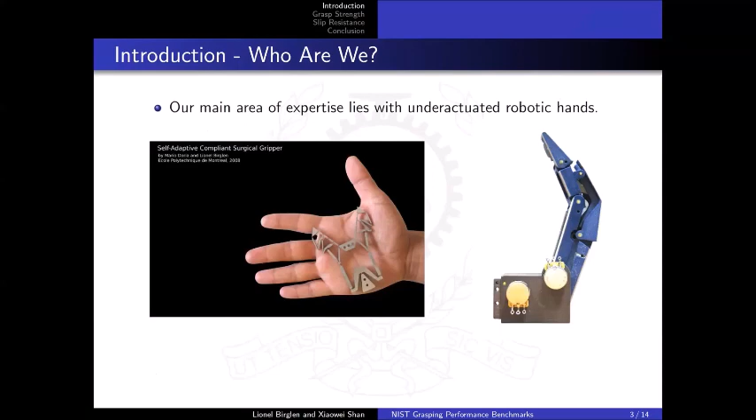One word of warning, maybe. We are robotic hand designers, and we are mainly focusing on grasping. We do very little manipulation. We have dabbled a little bit with manipulation in the past, but that's not our forte. And we don't do so much grasp planning. So this presentation has to be understood as coming from people who design hands for grasping. So this has a strong influence on what we have been doing and how we see the NIST test bench.

Basically, to make a long story short, in 2016, we received a grant from the federal government in Canada to prepare for the commercialization of our adaptive finger design, which is illustrated here on the left. And at that time, we thought it would be a good opportunity to replicate the NIST test bench and to use that to characterize our fingers. So this is the backstory of our replication of the protocols provided by NIST. And with that, I'll leave the virtual floor to Xiaowei to present the technical aspects.

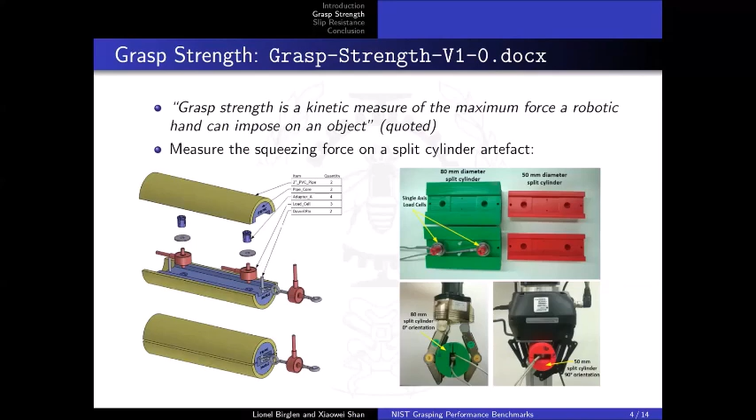Multiple cylinder diameters should be used for the preload capabilities of a particular hand for various object sizes, as can be seen from the right-hand figures. Next. Here is a data plot example in the benchmark of the total grasp force, namely two load cells, through which the mean grasp force was extracted for each data set. Next.

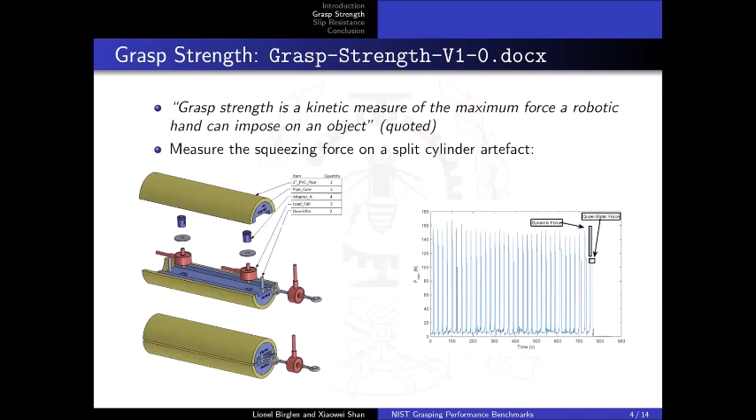In analogy, our tests utilize two artifacts, 2 and 3 inches, designed and built with multiple uniaxial load cells, as can be seen from the figure on the left. 3 load cells and the steel plate were mounted on the upper and lower cores, respectively. Actually, we redesigned the split artifact a little bit because fewer load cells may lead to imbalance, while more load cells may not be able to touch the steel plate simultaneously, probably due to fabrication errors. The 3 load cell configuration avoids the problem, since 3 sensor tips define a plane that can always be adapted to by the steel plate.

The reason we use steel plate is to avoid the shear force exerted from the fingers, because shear motion cannot be constrained by the steel plate, but it does not affect the transmission of the normal force along the sensitive direction of the load cells. Finally, rubber bands were utilized to bond the 2 cores. The preload of the rubber bands can also be zeroed in advance.

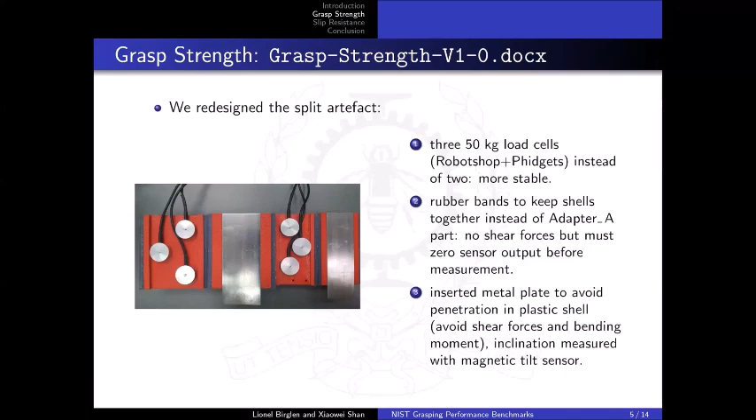Next. The artifact using 3 load cells was calibrated with known weights. The upper core facing downward is screwed with the load cells. The sensing tips directly touch the steel plate, which is clamped on the table with an underlying wood board. The weights were measured with a precision scale and then added in a bag hanging onto the artifact. Next.

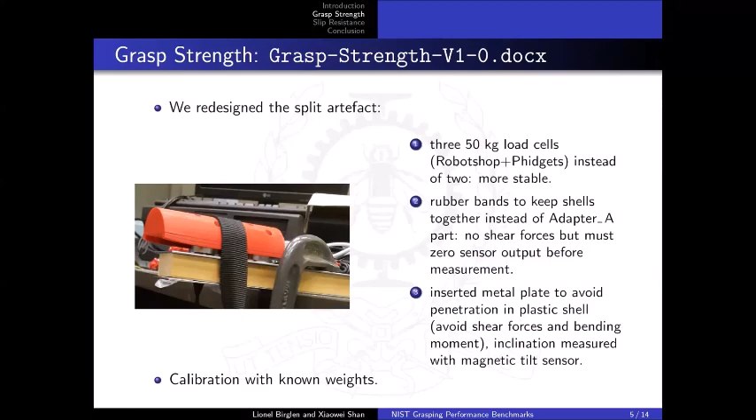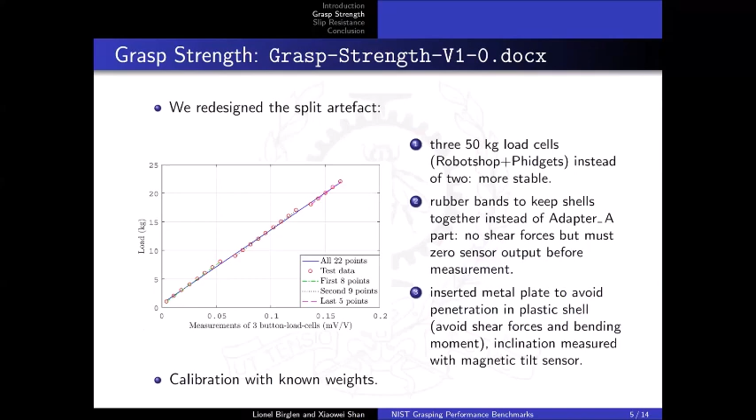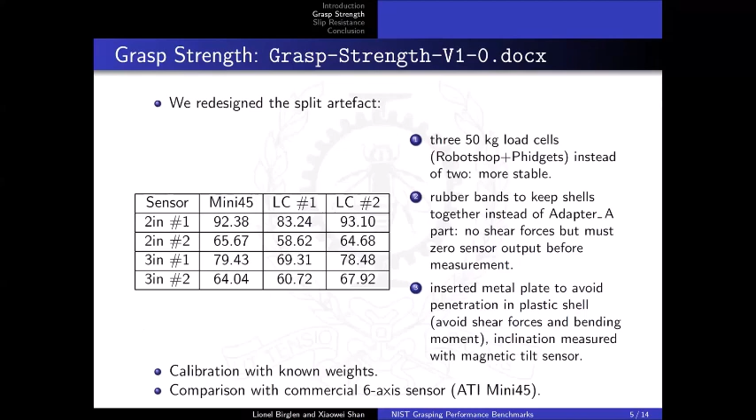Actually, we ended up usually relying on the version with the ATI sensor, but as long as the calibration of the load cells is verified, it is an accurate replacement to build an artifact with relatively cheap load cells. We can see the comparison of the cost. There still remain some issues. First, calibration is important, as can be seen from the comparison table previously.

Second, the half shells sometimes separate because of the bending moments from the fingers, and also because the fabrication is not perfect. The two fingers are not exactly symmetric, so there are also shear forces applied onto the artifact that sometimes shear the two cores apart.

Moreover, sensitivity to the tilt angle is worrisome. For example, how to hold the artifact in the air before the finger grasp is a concern. Many manual holds cannot ensure the orientation and contact height, although we have the tilt sensor. It was found that orienting the hand horizontally instead of vertically in the benchmark and placing the artifact on the breadboard with a sponge below could generate much less fluctuating grasp forces. It is an interesting finding in our test.

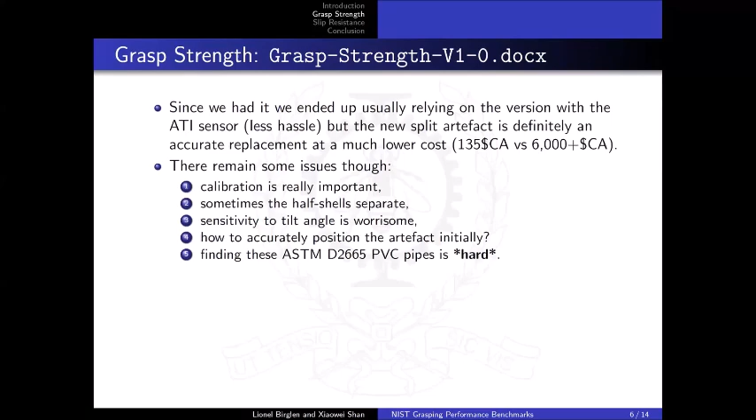Okay, the next test benchmark we have tried is for the slip resistance. It is defined as a kinetic measure of a robotic hand's ability to resist a slip. The focus of this metric is to investigate the inherent surface friction properties of the hand. There are three steps based on the figures. First, place a cylindrical artifact in the robotic hand using a wrap grasp at maximum power.

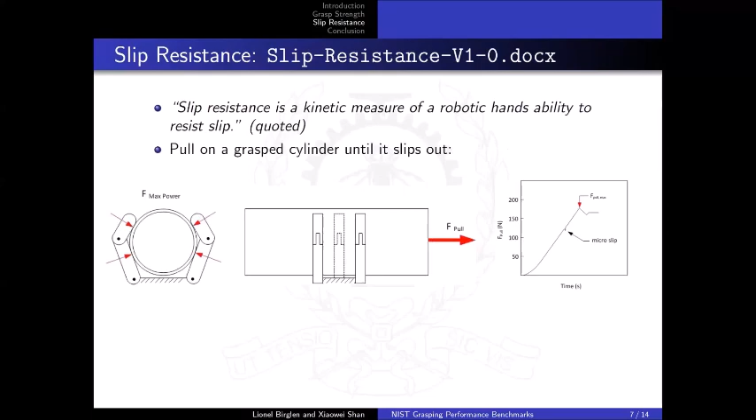Second, pull on the pipe at a controlled rate of increasing force, recording force until gross slipping is visually confirmed between the hand and the PVC pipe. Third, repeat this process over a range of standard PVC diameters that the robotic hand is capable of grasping. Next.

This figure shows an example test in the benchmark. It was conducted by commanding a fixed robotic hand to wrap around the standard PVC waste pipe. The common trend in the test was that the pull force increased almost linearly before reaching a peak force, and then yielded a sudden drop in the pull force. The selection of spring, I think it's next page. Yes, the selection of the spring and linear actuator is very important for the control of the load rate. Next.

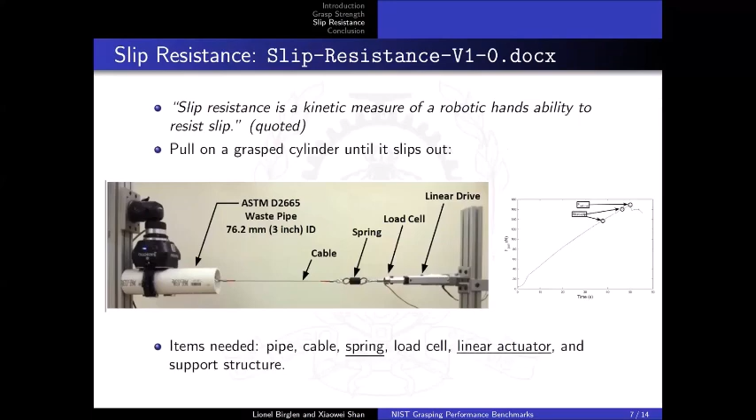In our replica, a linear stage provides incremental loading on the pipe through the fishing lines. The fishing lines are attached to an S load cell and the L bracket, as can be seen from the left figure. The load rate is decreased using an inline spring. The measure of interest in this test is the maximum obtainable pull force under grasp. The test was conducted under a nominal 6-bar pressure by the pneumatic actuation.

On the right side, we can see the corresponding test results of some different configurations. It is not exactly like in the benchmark described that there's a sudden drop. Sometimes there's just a gradual change after the pull force reached its maximum. So it's another interesting finding.

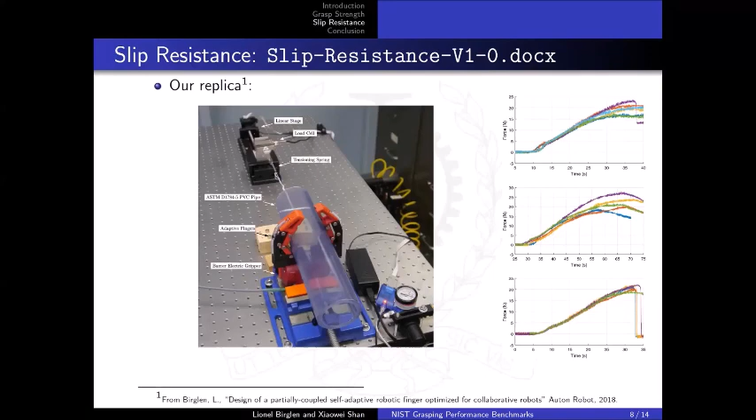Next. This figure on the left side, we used this setup also to measure the pullout resistance of various configurations, in addition to wrap and pinch grasping. Especially, you can see from the lower left side, the pull-out configuration of a robotic hand was illustrated. The corresponding test results are also shown in the right-hand figures.

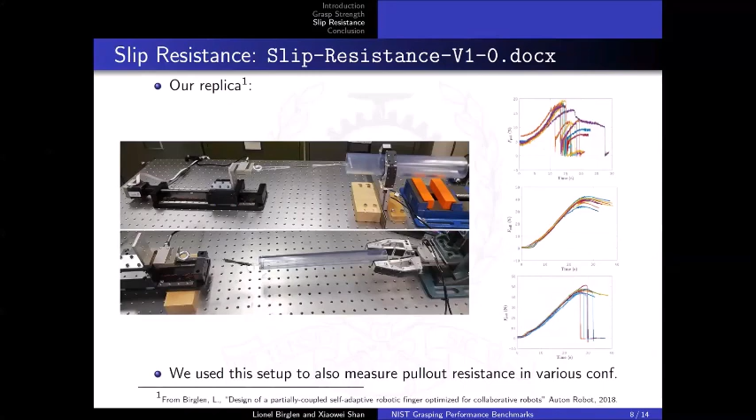Because for the pull-out test, the artifact dropped out of the hand, there are some very sudden drops in the force in the test results. Next. These are the components we used for the test setup. Still, a few minor issues remain for further consideration.

First, the test results can be quite variable for power grasps. We suspect how the object is placed in the hand is one of the culprits, because sometimes, if we put the artifact directly onto the hand, after grasping, the initial impact may lead the artifact into another orientation. And if we manually hold the artifact, the height and orientation can also be tricky. So there comes the variety of the power grasps in the test results.

Besides, the spring stiffness and load rate must be selected in accordance with each other for repeatable results. This is also after trial and error, we found that the load rate needs to be very well considered, combined with the purchase of different springs and the stroke range of the linear actuator we purchased.

In addition, the travel range of the linear actuator is related to the expected pull-out force and spring rate, as explained just now. Finally, we had alignment trouble sometimes when the pipe reached its end under grasp. But generally speaking, the test setup works very well as a low-force universal test machine.

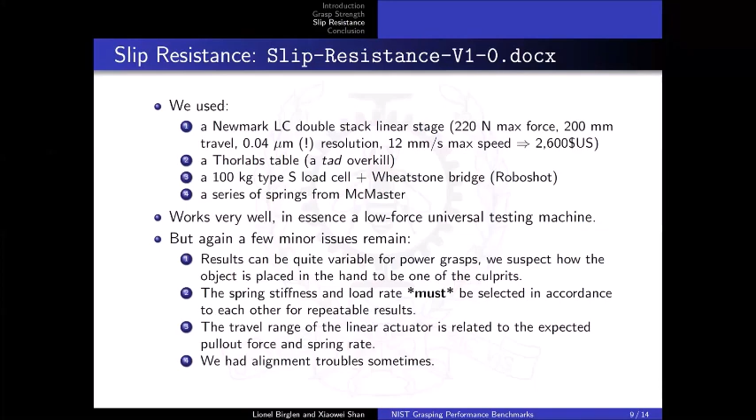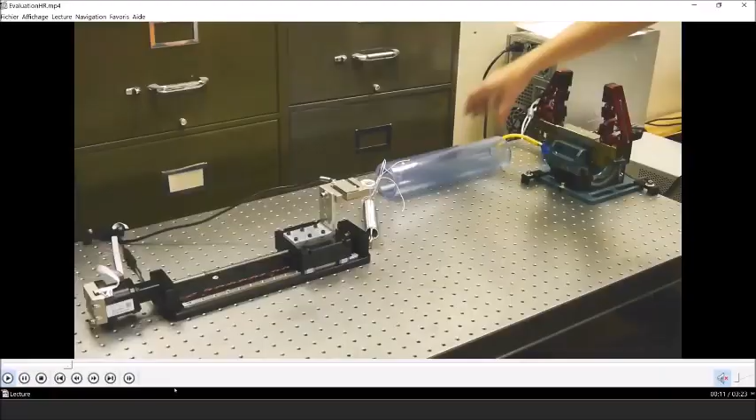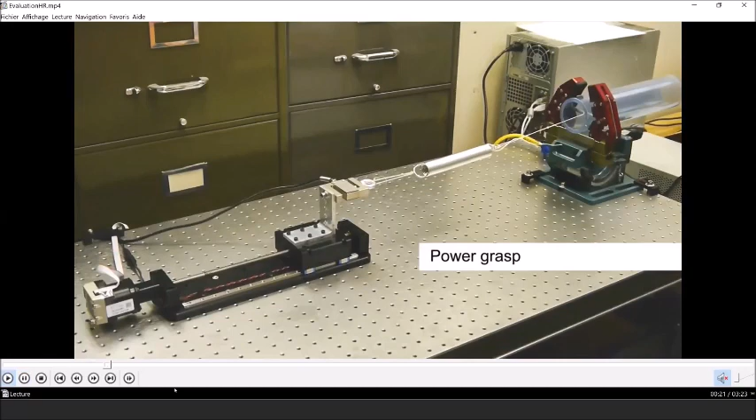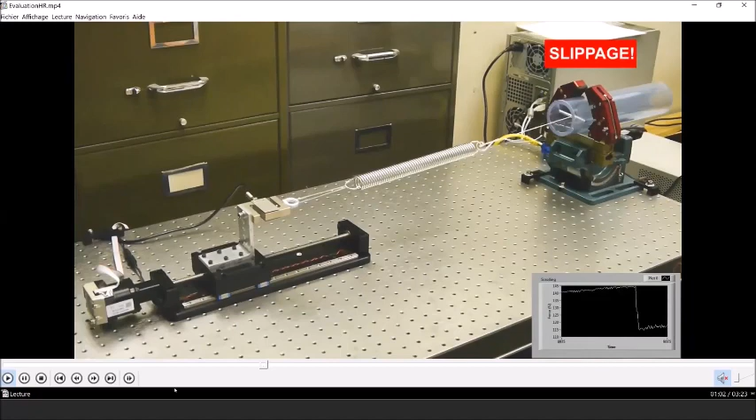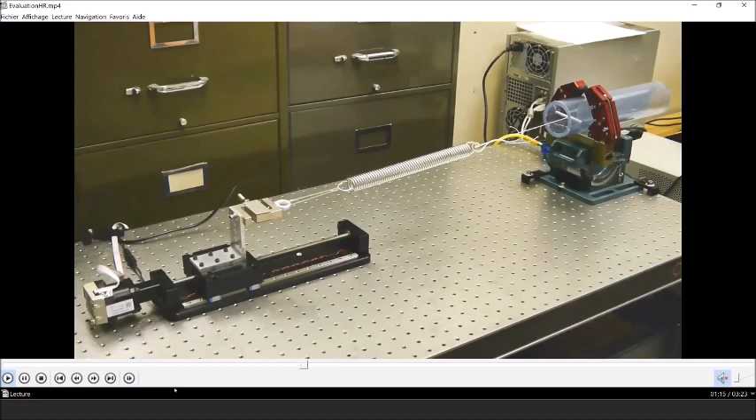At one point, very soon, I think slippage will occur, and you will see that also around the hand. You will see obviously the object slipping. There it is, and there it is. Most of the time we found that when slippage occurs, it is not catastrophically occurring. What I mean is that the object slips a little bit, but the hand is still grasping it afterward, but with a much lower grasp force.

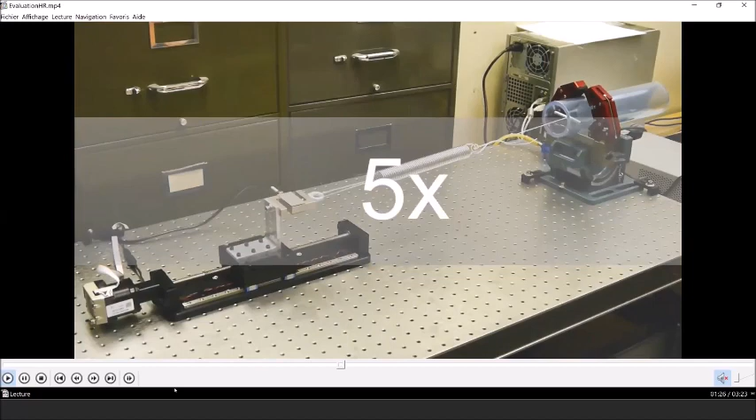This is actually something we found occurring with many different settings, many different grippers and hands. So it's actually quite good because it makes the grasp and even the slip resistance quite safe, meaning you're not slinging a piece of PVC pipe around in the lab.

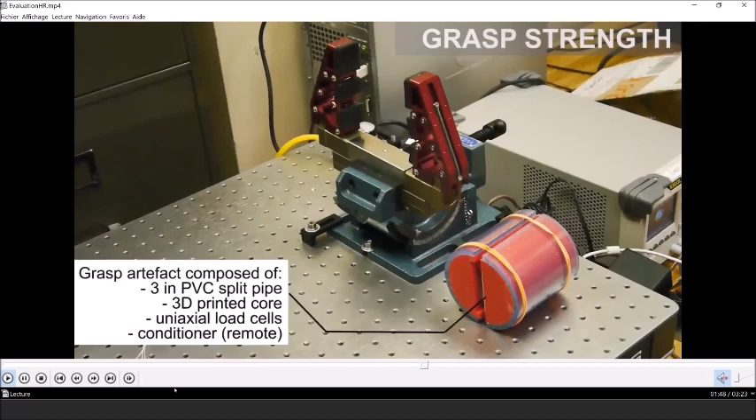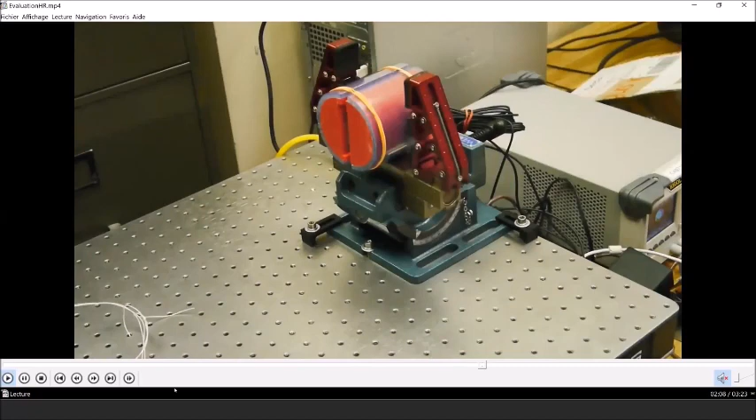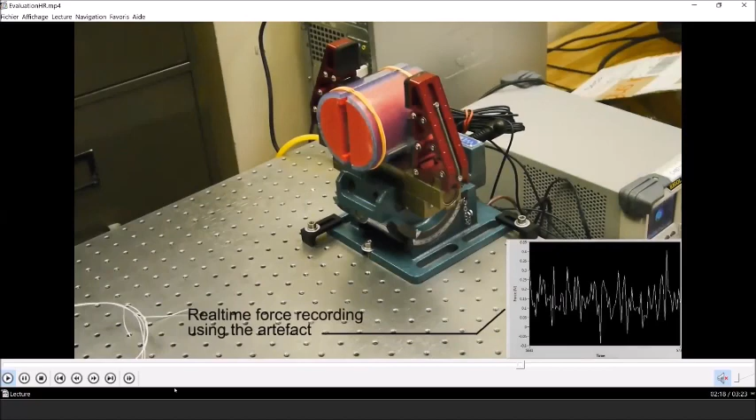This is the second test, well actually the first one we present today, the grasp strength. You can see our artifact with the two 3D printed shells inside the PVC pipe, and the whole thing is held together with rubber bands. This is actually quite simple. You put the whole thing in the hand and you close the fingers. Again, you have the real-time force recording. I think in this video there are 3 grasp and release sequences.

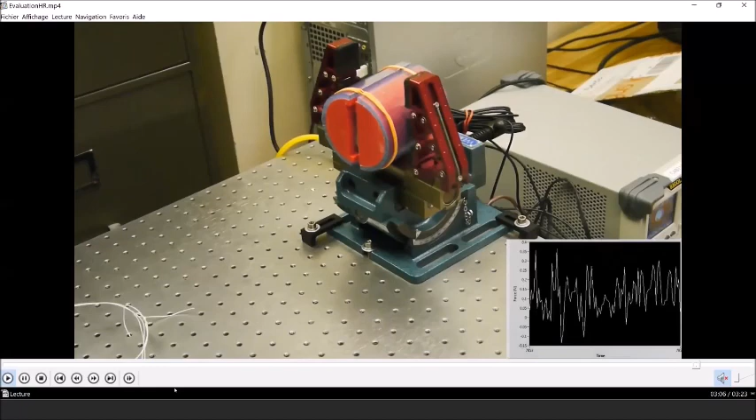But typically we run the test, correct me if I'm wrong, Xiaowei, 30 times, and we compute the average of the grasp strength thusly estimated. There's nothing really spectacular to see here. But notice one thing: the half shells are oriented vertically. This is sometimes a bit difficult to make sure of, which is why we use the tilt sensor also, just to make sure that we have the right orientation with respect to gravity.

Here are the final force profiles, and you can see that the average grasp strength we measured was around 150 newtons. Okay, so I'll go back to the normal slides.

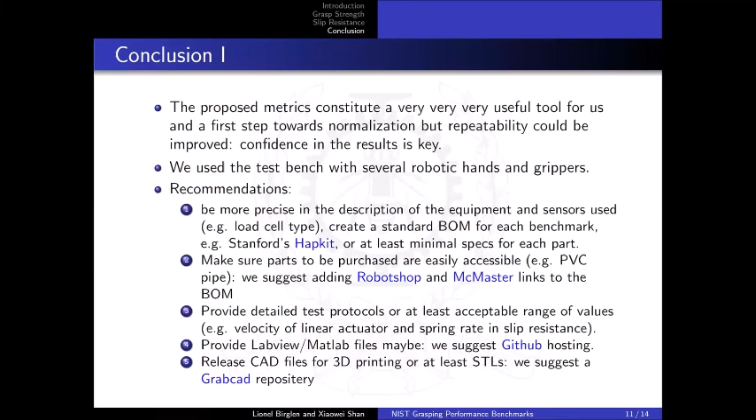We're very happy that all the equipment was actually not very expensive. The most expensive piece of equipment we purchased was a table, and that was clearly overkill. We didn't need a lab table to do that. Besides that, the linear actuator was also over spec. We could have gone with something cheaper, but we had the budget for once, so we spent it. But affordability is really important, because if to replicate the benchmark you need $100,000 in equipment, I think nobody would do that.

It would be nice, but maybe that's just a dream, to have different test benches in different labs around the planet, and to be able to compare the same hands and see how reproducible the results are. Or alternatively, maybe we can have an online database of results. But I'm not sure about the legality of this, because if you start putting numbers for some companies' hands and they're not happy about that, they might sue you. So I'm not sure this is such a good idea, but why not?

In the end, we only used 3 of the 11 documents provided by NIST. We used the grasp strength document, the slip resistance document, and the split artifact document. We also investigated, but didn't really go deep into, grasp efficiency and grasp cycle time. We did some experiments with them, but not enough to report to you today. And it was not really necessary to characterize our fingers, so we didn't spend much time on that. But there are still many more documents to comment on, so I think more people need to get involved.